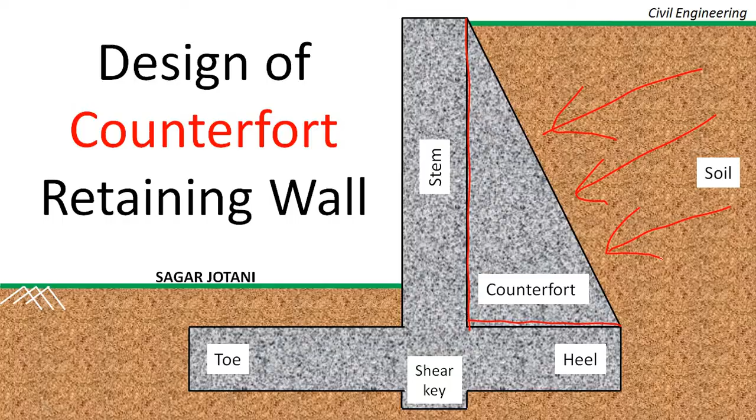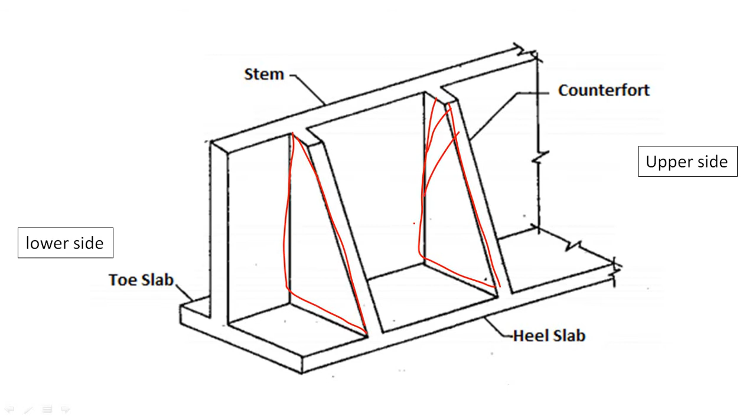Let us move to another figure. This upper side is where the soil is to be retained, and this is the lower side. This full side will be filled with the soil which is to be retained. Here you can see these are known as counterfort - this additional slab, or additional counterfort, which is connected with the slab, and the bottom connects with two things.

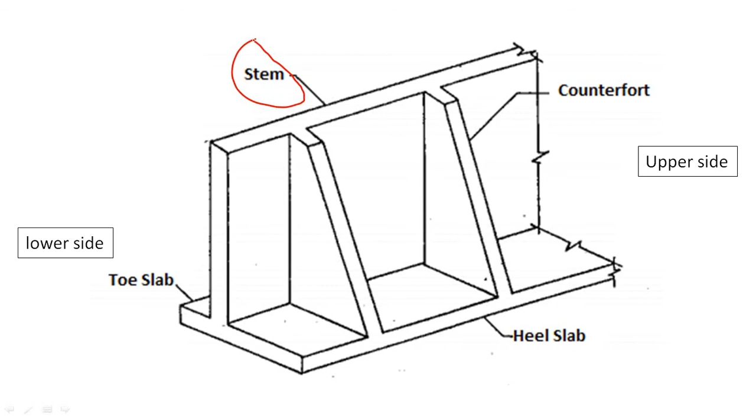We'll see how much distance is to be kept between these counterforts, and what are the criteria, or the design of the stem, the counterfort as well as heel slab and toe slab. Let us move ahead with the question.

The question is: design an RCC retaining wall with counterfort required to support earth to a height of 7 meters above the ground level. So here is our structure, and the height of this structure from the ground level is given as something 7 meters.

The top surface is horizontal. The trial pit at a site indicates soil bearing capacity as 220 kilonewton per meter square is available at the depth of.

The depth below the ground, which is the depth of the footing, is 1.25 meters below the ground. The weight of the earth, or gamma, is provided as 18 kilonewton per meter cube, the angle of repose is provided as 30 degrees, and the coefficient between the soil and the concrete is 0.58.

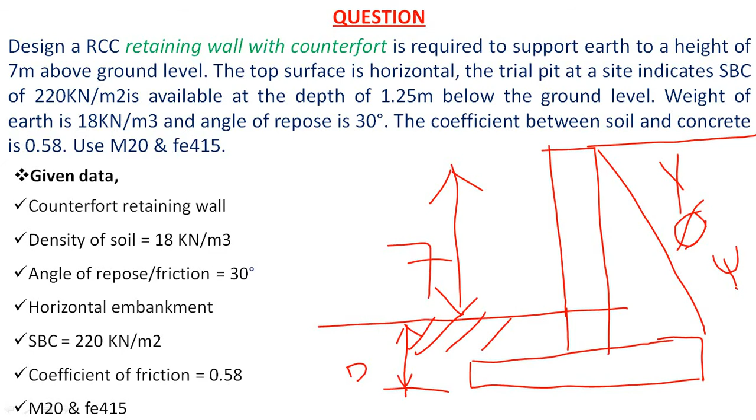Use M20 and Fe415 grade of steel. So the given data is: counterfort retaining wall, density of soil is 18, angle of repose 30, horizontal embankment SBC is 220, coefficient is 0.58, and grade of concrete M20 and Fe415 grade of steel.

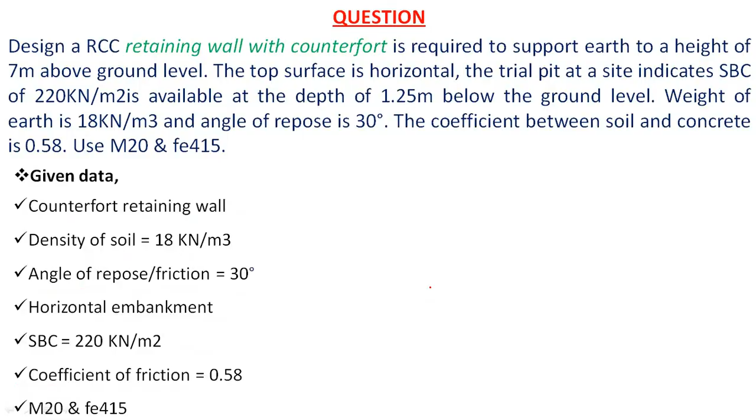So it is something like this. The given data is the height from the ground, then the depth of the footing, as well as the soil data, which is gamma, then the angle of repose as well as coefficient.

These unknown values are height of stem, then the thickness of the stem, thickness of the base, total height of the retaining wall, xh, xt, and width of the base slab. These unknown things we have to calculate.

The first step is the dimensions of wall. For the dimensions of wall, we already have the small h as well as the df, so we can find the capital height. The capital height is equals to small h plus depth of the footing. So we have calculated the total height of the retaining wall as 8.25 meters.

Next we will find Ka. Ka is equals to 1 minus sin phi upon 1 plus sin phi, which is 1 by 3. Now we will find xh dash, which is equals to capital H into under root Ka by 3. In our case Ka is 1 by 3, so we have found the value of x dash h as 2.75 meters.

Now we will find the base. The base is equals to 1.5 into x dash h, so we have the base as 4.5 meters.

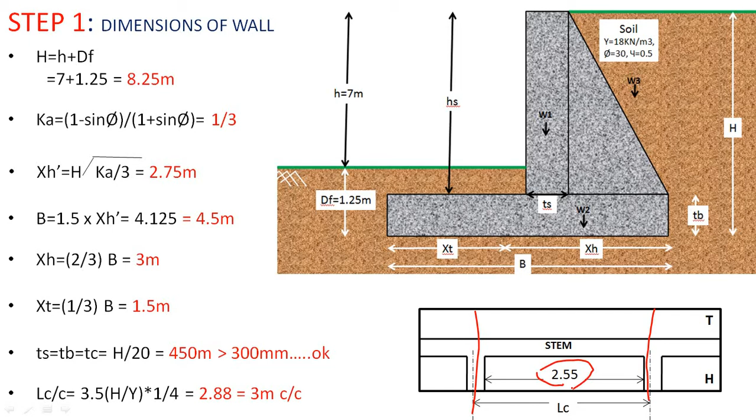So we can find the face to face distance by deducting half thickness from the right hand side and half thickness from the left hand side. So we'll have this face to face, or wall to wall distance, as 2.55 meters.

So here we have found all these things, that capital H was given in the data, along with small h and df. So we have calculated hs as 7.8, capital H as 8.25, TB or thickness of base as 450, TS as 450, as well as the thickness of the counterfort as 450 mm, and xt is 1.5 meter and xh is 3 meters, and the base, or width of the base, is 4.5 meters.

So the second step is for the stability check. For it, first we will find the horizontal force. In this case the horizontal force will be due to the soil.

So we will have the active pressure due to the soil in a triangular distribution. For this it will be half Ka gamma h square. In our case the pressure will be something like this, from here to here. So half Ka gamma into capital H square.

So we have the earth pressure, horizontal earth pressure, as 204.18 kilonewton.

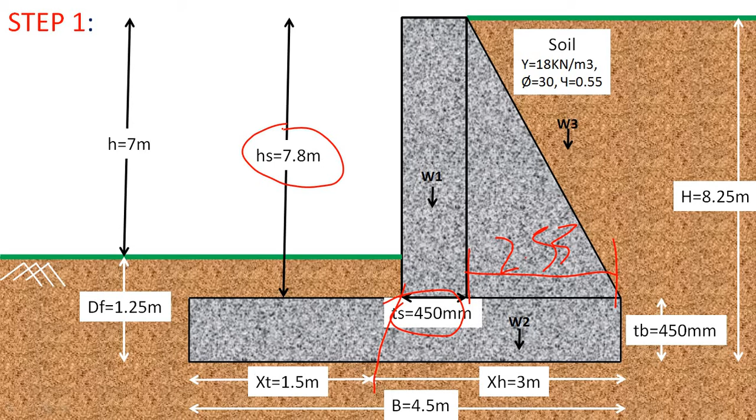Coming on to the soil, it will be 2.55 into 7.8 into 1 into 18. This distance of 2.55 comes from the total distance of 3 meters minus 0.45, so it becomes 2.55. So 2.55 into height 7.8 into density 18.

So we get 358.02 kilonewton. Now coming on to the vertical distance, the perpendicular distance from the toe for W1 will be 1.725 meter, for the base W2 it will be 2.25 meters, and for the soil W3 it will be 3.225. Similarly, we will find the moment.

So the moment will be vertical force into perpendicular distance. For W1 we have obtained the moment as 151.36 kilonewton into meter in the clockwise direction. Second, for the base W2, it is 113.89 kilonewton into meter, also clockwise direction.

For the soil, W3, it is 1154.61 kilonewton into meter, which is in the clockwise direction. So we will have the summation of all these moments.

So we have the summation as 1419.89 kilonewton into meter in the clockwise direction, and it is the stabilizing moment. Similarly, we will have the summation of the vertical force. So the total of the vertical force is 496.39 kilonewton. We will use all these values: vertical horizontal force, the overturning moment, the vertical force, and the stabilizing moment for the check.

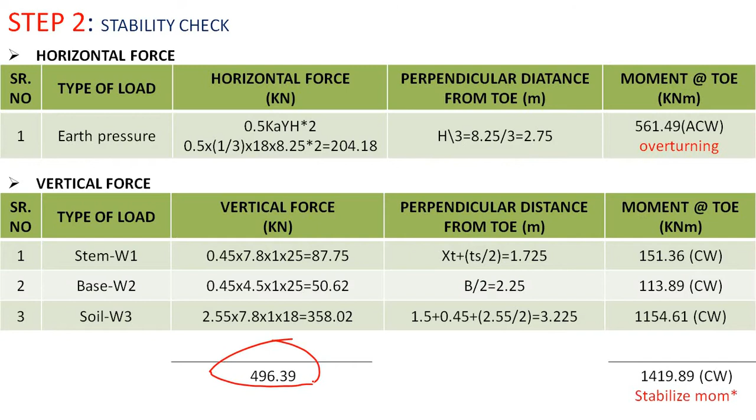Coming into the second check, which is the sliding check. For sliding, factor of safety equals 0.9 into the coefficient into the force, or we can use force divided by PA. So 0.9 into coefficient 0.58 into the vertical force, which is 496.39, divided by PA, which is horizontal force, 204.18. So we have the value of factor of safety as 1.26, which is less than 1.4. So it is not safe and it will fail against sliding.

So to avoid the sliding, we have to provide the shear key which will resist the sliding force. Here you can see the concrete part, which is known as the shear key. We have to provide the shear key with the dimension of the thickness of the stem or the base. So I have provided the size of the stem as 450 by 450 only. Now what we will do is find some height.

So we have to plot this kind of figure. First we will find h1, the height shown here. For finding h1, it will be 0.45, which is the height, plus 1.5 tan theta, and we have obtained the height as 1.36. So HP will be h1 plus df. We have found the value of HP as 2.61 meter. Similarly, we will have Kp.

Kp is equal to 1 plus sine phi upon 1 minus sine phi. So we have the value of Kp as 3, and the passive earth pressure, which will be the resisting force in this case, will be 0.5 Kp gamma into HP square minus df square. So we have obtained the passive earth pressure as 141.73 kilonewton.

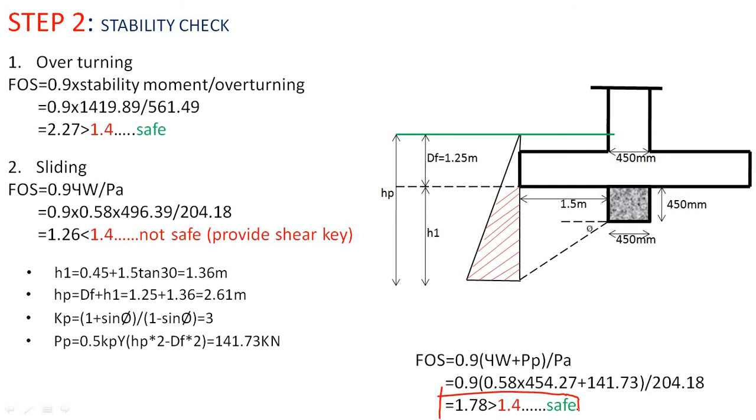Next we will check for the earth pressure. For this check, we will find two values: maximum pressure and minimum pressure by the earth. First, for the maximum earth pressure, the equation is summation of W, which is the vertical force, divided by base, plus 1 divided by base into 1 plus 6e by b. The unknown in this case is small e, so first we will calculate small e.

Small e is equal to capital B by 2, minus summation of the moment, which will be the net moment, divided by summation of the force, which will be the vertical force. In our case, B is 4.5, divided by 2, minus the net moment, which will be the stabilizing moment minus overturning moment, divided by vertical force. So we will have the value of E as 0.52.

Now by putting the value of E into this equation, we will have the maximum pressure of this soil as 186.79 kilonewton per meter square, which is less than SBC, so it is okay and safe. Coming onto the minimum, the minimum pressure will be summation of W by B into 1 minus 6E by B.

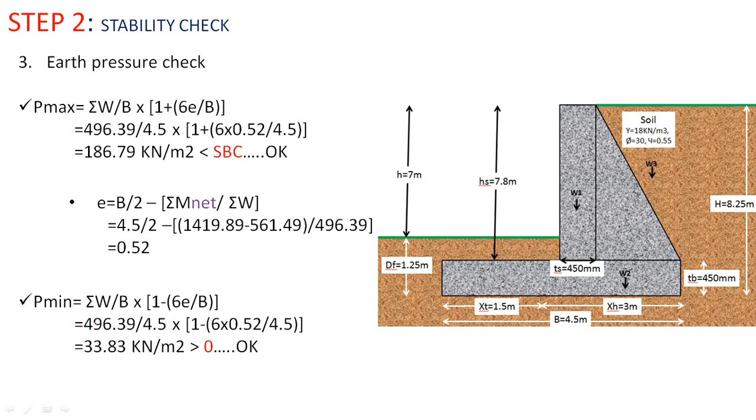So now coming on to the design of the toe. First you have to plot this figure which shows the toe. So for the toe portion, the width of the toe is 1.5 and the depth will be 0.45 meters.

Now what we have to do, we have to make the soil pressure. So this figure is for the soil pressure, which indicates the right hand side is the minimum pressure and left hand side is the maximum pressure. As I told you, the value of maximum pressure and minimum pressure will be used in the calculations, so these values have been provided.

Now at this face of the toe, we have to find the pressure. So we will interpolate the values, and we have calculated the pressure at the face. We have obtained 135.80 kilonewton per meter square.

So now coming on to the calculation, first we will find the moment. So Mu is equals to 1.5 into area into Cg, simply area into Cg. So we will first make the parts. The first part is the rectangular portion, then second part will be the triangular portion, and the last part will be the toe.

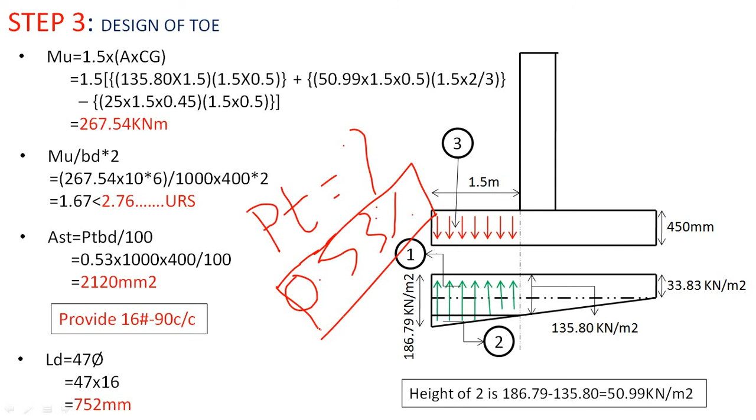By using this percentage, we will find the Ast. So the Ast is equals to PT into BD by 100. So we have obtained the area of steel as...

2120 mm square, and we have provided 16 dia, 90 center to center, and LD. So LD is equals to 47 phi. In our case, the diameter is 16, so we have the LD, or we can say lap length, is 752 mm.

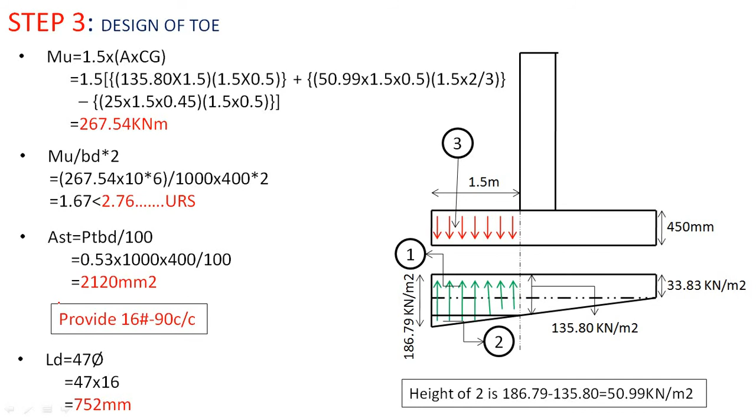So next, coming on to the shear check. The shear will act at the D distance, the shear check will act on the D distance from the face of the stem. So here assume this is the stem and this is the toe, so it will act at a D distance from the face of the stem. So this will be the shear area, or we can say shear, which will be acted on this portion.

So it will be, first we will find the Vu. So Vu is equals to 1.5 into area. So we have done the part. Part 1 is this green one, and part 2 is the red one portion.

So coming onto the area, the first part of the area will be 186.79 plus, we have to find the height, or we can say pressure at this distance of D, which we have obtained as 151.09. So the area will be 186.79 plus 151.09 divided by 2 into 1.05 into 1, minus from the red portion, it will be 1.05, which is the width, into depth 0.45 into the density of concrete, which is 25. So we have found the value of VU, or shear force, as 248.36 kilonewton.

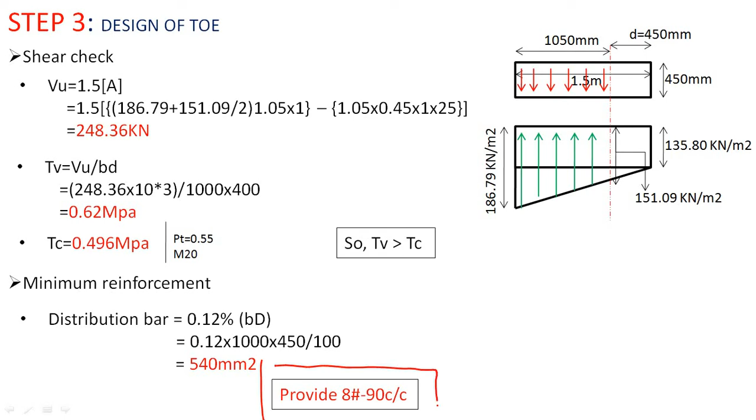Coming onto the design, or step number 4, which is the design of heel. First you have to plot this figure which indicates the heel component. So here you can see the pressure from the heel slab and the soil. First we will have the value of maximum pressure and minimum pressure of the soil, and find the pressure at this point. So we have obtained the pressure by interpolating the value, which is 120.5 kN per meter square.

So first we will find W1, W2. The W1 is the weight due to soil, so it will be 18 into 3 into 7.8, which gives 421.2 kilonewton per meter.

Coming onto the second part, it will be 25, which is the density of concrete, into 0.45, which is the depth or thickness, into the horizontal distance, which is 3 meters. So it is obtained as 33.75 kilonewton per meter. Total of these two will be 454.95 kilonewton per meter, and its diagram will be something like this.

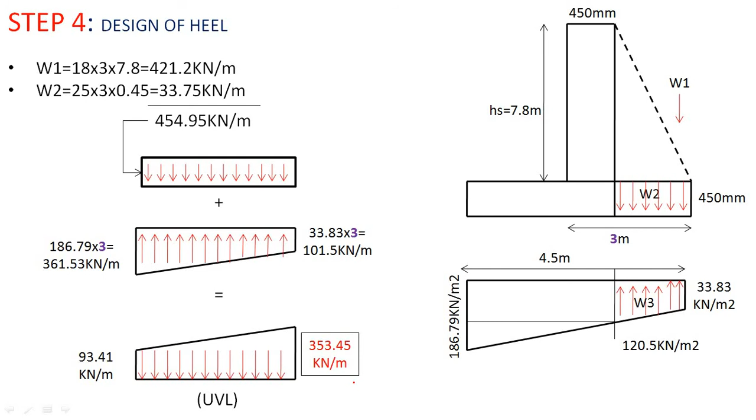So we will add this, making the summation positive and negative. So we will have the value on the left hand side as 93.41 kilonewton per meter, and on the right hand side as 353.45 kilonewton per meter, which will be the UVL. Now from these two values, the maximum value is 353.45 kilonewton per meter, so this value will be used for further calculation. So highlight this value, which is 353.45 kilonewton per meter.

So at the support, the moment will be WL square by 12, and at the middle it will be WL square by 16. Now coming onto the negative moment, the value of Mu will be 1.5 WL by 12.

So 1.5 into W. In our case, W will be the maximum value, which is 353.45 kilonewton per meter, into L, which is 3 meters, as we have seen the center to center distance between the two counterforts. So divided by 12, we have obtained the value of Mu as 132.53 kilonewton meter.

Now we will find the ratio of mu upon bd square. We have obtained mu as 132.53 kilonewton into meter, divide by 1000 into small d, which is 400, and its square. So we have obtained mu upon bd square as 0.83.

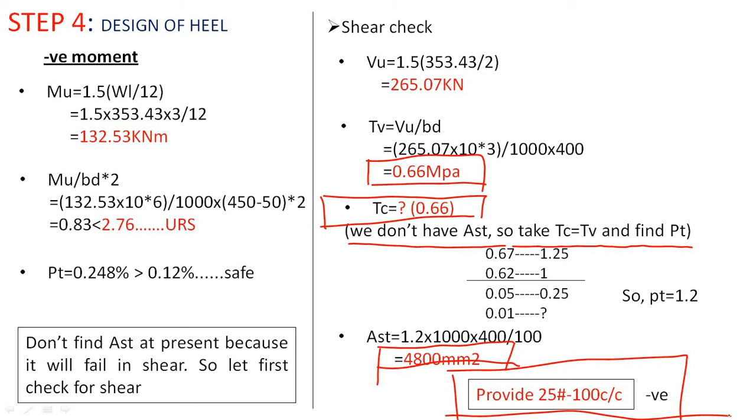Similarly, moving on to the positive moment, which will be at the middle span. Similarly, we will find the mu. So mu is equals to 1.5 WL by 16.

W will be 1.5 into 353.43 into 3 divided by 16. So we will have the value of mu as 99.4 kilonewton into meter.

Next we will find the ratio of mu upon bd square. So we have the ratio of mu upon bd square as 0.62, which is less than 2.76, which is an under-reinforced section.

By using the ratio of mu upon bd square, we will find the percentage of steel. So we have obtained the percentage of steel as 0.187, which is greater than 0.12, which is the minimum steel.

So which is safer. If it would be less than 0.12, we have to provide the minimum steel only, but in our case it is greater than 0.12, so we will use the PT as 0.187.

So AST will be 0.187 into 1000 into 400 divided by 100. We have obtained the area of steel as 748 mm square, and we have provided 10 dia 100 center to center, which will be the positive reinforcement.

Now moving on to the distribution steel, we will have 0.12%, which is the minimum steel. So AST is equals to 0.12% into B into capital D. We have provided the area of steel as 540 mm square and provided 8 dia 90 center to center as distribution steel for the heel.

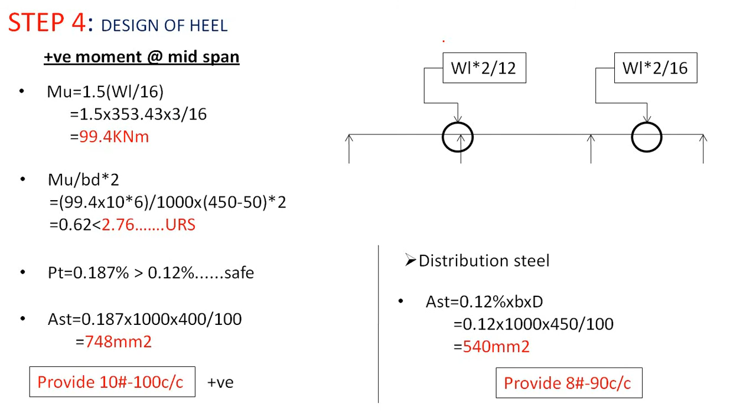Now we will find mu. So mu will get WL square by 12. As I told you, at the support it will be WL square by 12, and at the middle it will be WL square by 16. So in our case, at the support over here it will be WL square by 12, and here it will be WL square by 16.

So the mu is equal to WL square by 12. We have found the value of mu as 52.65 kilonewton into meter. Similarly we have found the ratio of mu upon bd square, and it is obtained as 0.33, which is less than 2.76, which is an under-reinforced section.

By using this ratio of mu upon bd square as 0.33, we have obtained the percentage of steel as 0.099 percentage, which is less than 0.12, as 0.12 is the standard, or minimum steel provided by the IS code.

If the percentage is less than 0.12%, we must compulsorily use 0.12% as the minimum. In our case it is less than 0.12%, so we'll use the percentage of steel as 0.12.

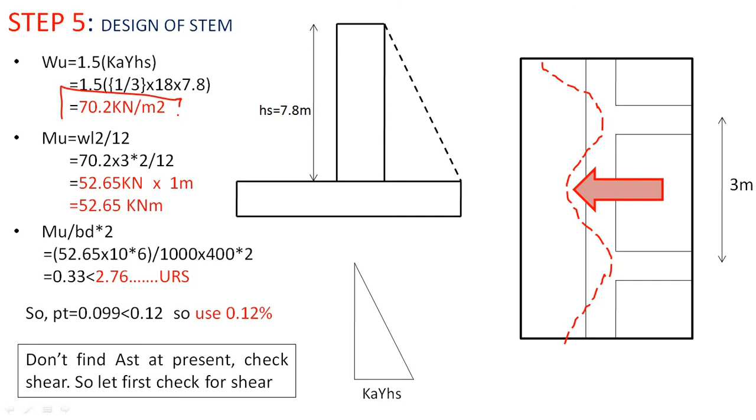But before finding the AST, we have to check for shear. So the shear check: VU is equal to WU into the center to center distance, 3 divided by 2, where WU was calculated in the previous step. So VU is 70.2 into 3 divided by 2, which is 105.3 kilonewton.

Now we will find tau v, which is equal to VU upon bd. We have obtained tau v as 0.26. Since we don't have AST yet, we'll make tau v equal to tau c, so we provide tau c equal to tau v. Using that value, we have calculated the percentage of steel as 0.15.

Using this percentage of steel, we find the area of steel. AST is equal to 0.15 into 1000 into 400 divided by 100, giving us AST as 600 mm square. We have provided 10 dia bars at 130 center to center, and found the value of LD equal to 47 phi. Since the diameter is 10 mm, the lap length is 470 mm.

Coming on to the middle span, no need for this calculation, because the percentage of steel is 0.09%, which is less than 0.12%. So we'll directly provide the minimum steel at the middle span, since the percentage of steel is less than 0.12%.

So AST is equal to 0.12 into small b into capital D. We have obtained and provided the steel as 10 dia at 130 center to center.

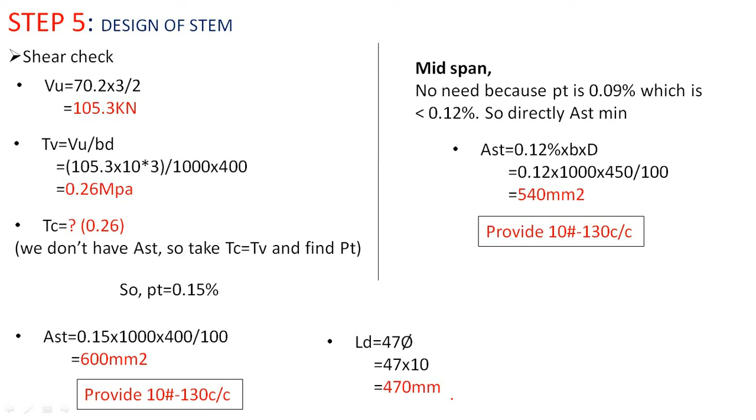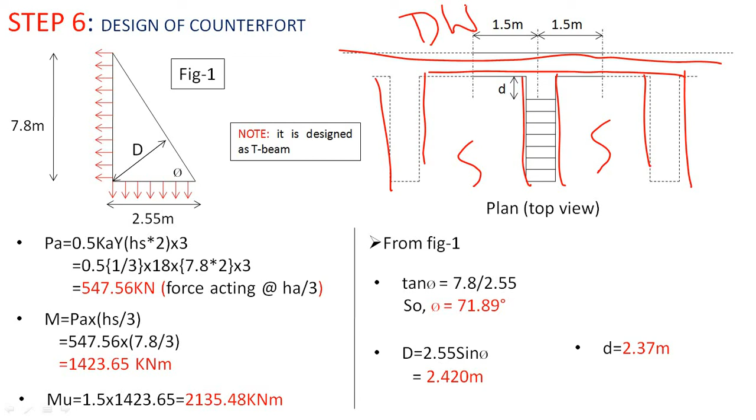Now coming on to step number 6, design of the counterfort. First it will be designed as a T-beam. This will be the continuous stem, and this will be the retaining counterfort, provided at a center to center distance of 3 meter. This is the soil to be retained, and this is the downward side. The center to center distance is 1.5, totaling 3 meter. This portion will act as a T-beam.

We will have the D distance from the face, shown here as D, and similarly on this part the D distance. Now coming to this figure, the counterfort will look something like this, in a triangular portion. The height of the counterfort is 7.8 meter, and the base is 2.55 meter, acting pressure in the horizontal as well as vertical direction.

First we will find this D. To find D, we will come onto it. But before finding D, we need the active pressure.

Talking about the active pressure, it will be 0.5, which is half Ka gamma h square into 3, the distance between two counterforts. In our case, half into Ka is 1/3, into gamma of soil 18, into Hs 7.8 square, into 3.

So we have found the active pressure as 547.56 kilonewton, which will act at a distance of h/3 from this portion. Coming on to M, the moment, the moment will be Pa into h/3, generated like this.

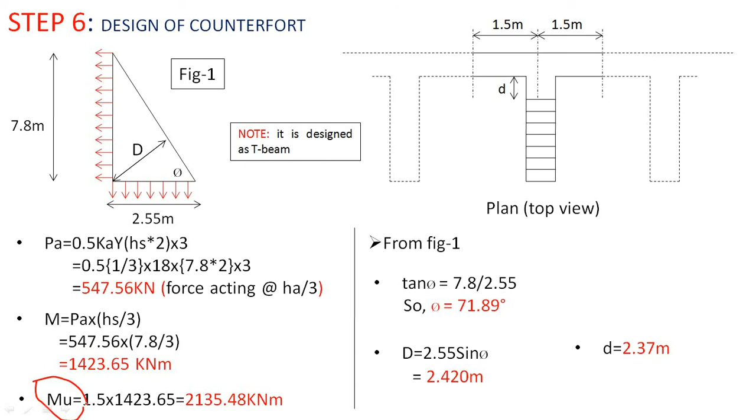Now coming to the next, as we have obtained Mu, which is the factored moment, which is 2135.48 kilonewton into meter, next we will find the ratio of Mu upon bd square.

So we have obtained the ratio of Mu upon bd square as 0.844, which is less than 2.76, which means under-reinforced section, so it is okay.

By using this ratio of Mu upon bd square as 0.844, we will move to the SP16, and from this we will have the percentage of steel, which we have obtained as 0.248, which is greater than 0.12, so we will use the percentage of steel as 0.248, and we will find the area of steel.

So we have obtained the area of steel as 2645 mm square, and we have provided 25 dia, 6 numbers. And development length, or lap length, we have provided as 1175 mm as lap length for the counterfort.

Now coming to the curtailment. So the curtailment height will be: double h double dash by hs, into its whole square, is equal to half. So we will make this subjective to h double dash.

So we will have 7.8 divided by 2, and it will be under root. So we will have the value as 5.51 meter. It means one bar will be of the full height, and one bar at 5.51 meter from the bottom.

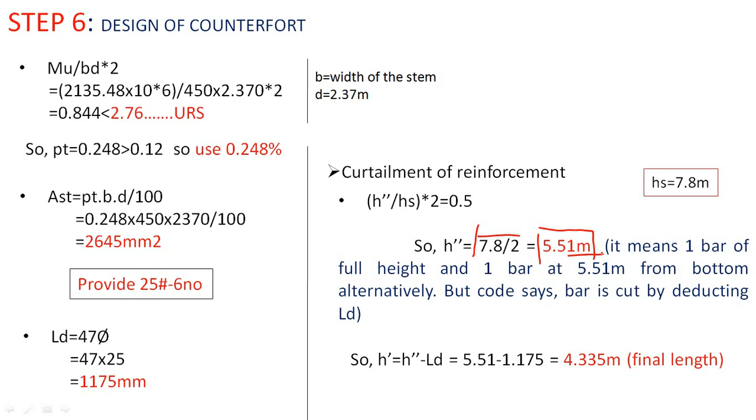Now coming to the stirrups design, we have to design vertical stirrups as well as horizontal stirrups. So first we will move to horizontal stirrups, which will be shown in this figure for the counterfort, moving on to horizontal shear reinforcement.

So first, VU is equal to 1.5, which is factor of safety, into Ka gamma HS by into 3. So we have obtained VU, which is shear force, as 210.6 kilonewton.

Now by using the formula VUS is equal to 0.87 Fy ASV into D by SV, we will make this subjective to SV, as highlighted in red color. So for it, the unknown thing is ASV, which is the area of shear stirrups.

So we will assume 2-legged 8 diameter. The area of this 2-legged 8 diameter will be 100 mm square. So we will place ASV as 100, and we have this spacing as 170 center to center, so we will provide 2-legged 8 dia, 170 center to center.

Similarly, coming to the vertical shear force, the shear force VU will be the maximum, as we have seen in step number 4, UDL. So it is 353.43 kilonewton per meter.

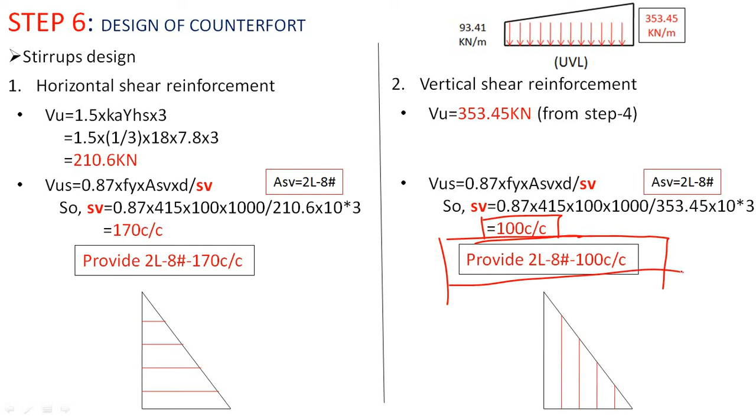So by using this equation of VUS is equal to 0.87 Fy ASV into D by SV, we will make it subjective to SV, and in our case ASV will be 100 mm², as we have assumed 2-legged 8 diameter. So we will have this spacing as 100 mm center to center, and we have provided 2-legged 8 dia, 100 mm center to center as vertical stirrups.

Now last step number 6, which is the figure. So for the figure, you can see the horizontal stirrups which have been provided at 2-legged 8 dia, 150 center to center.

And the vertical, which is 2-legged, 8 dia, 200 center to center. Similarly, the steels have been provided, and here all the different kinds of data which you have calculated are placed.

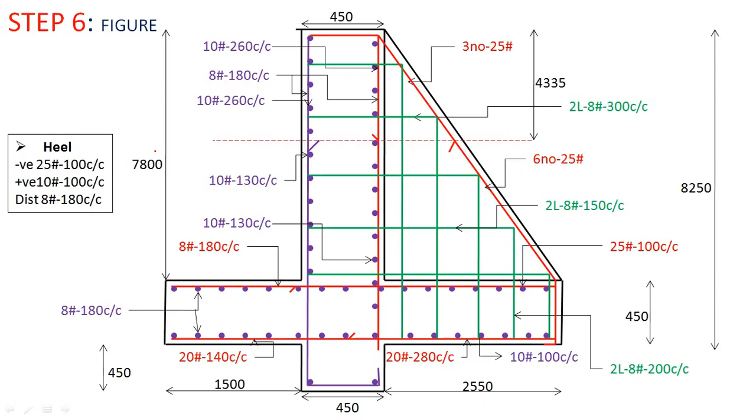Here we successfully complete the design of the counterfort retaining wall, in which we have seen the dimension of wall, then the stability check, design of toe, design of heel, design of stem, design of counterfort, as well as the figure. Hope you have enjoyed this video.